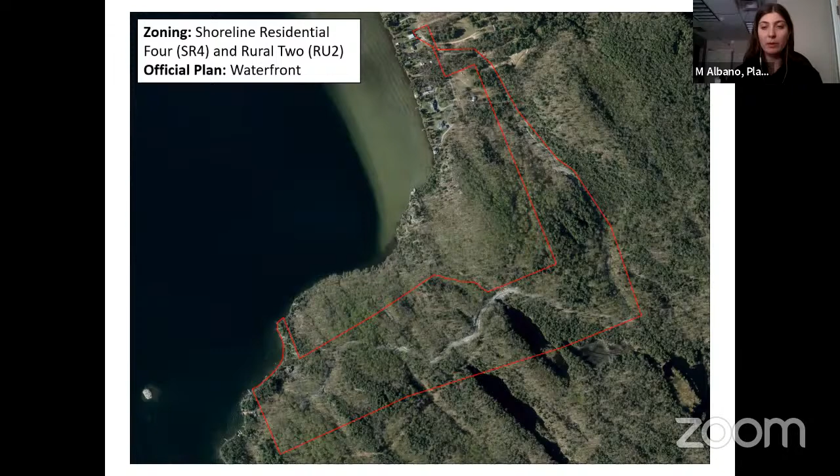Yes. Alrighty, perfect. Through you, Mr. Chair, the subject property is located at 658 The Bitter End. The lot is zoned Shoreline Residential 4 and Rural 2 under Huntsville's zoning bylaw and designated waterfront in Huntsville's official plan.

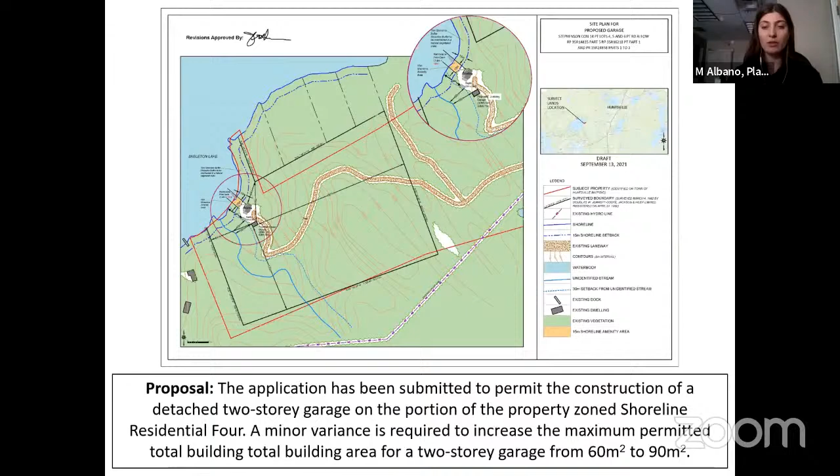The application has been submitted to permit the construction of a detached two-story garage on the portion of the property zoned Shoreline Residential 4. A minor variance is required to increase the maximum permitted total building area for a two-story garage from 60 meters squared to 90 meters squared.

Based on the configuration of the property, the increase in total building area for the two-story garage is expected to have minimal impact on the surrounding properties as the garage is compliant with the required setbacks and the lot is densely vegetated outside of the building envelope. This will also result in no visual impact from the private road or water. The design of the garage is in keeping with the character of the surrounding area and reflects the scale of the dwelling. Additionally, the garage is proposed in the most appropriate location in an already cleared area with surrounding vegetation.

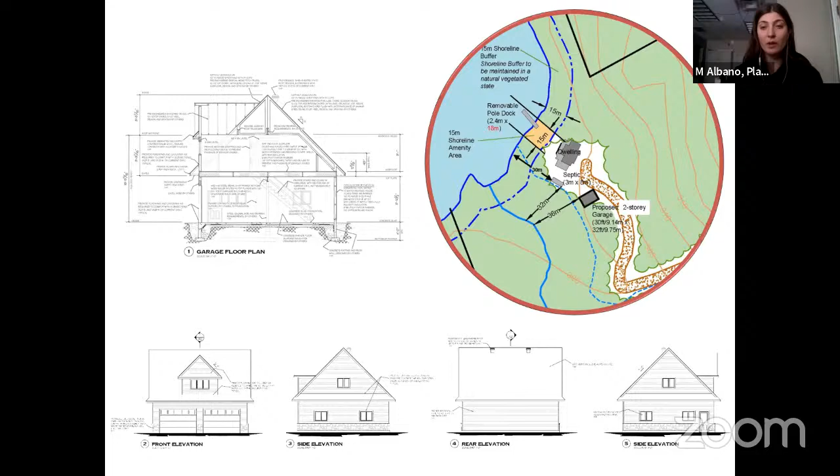Natural constraint mapping identifies steep slopes on a portion of the lot. As the garage is sited away from the steep slope areas, there are no concerns with respect to this natural constraint. The fish habitat abutting the shoreline is unevaluated. However, the proposed garage is set back over 30 meters from the shoreline of Skeleton Lake, so risks to any potential type 1 fish habitat are appropriately mitigated.

The application was circulated in accordance with the provisions of the Planning Act. Two letters of support were provided for the application and provided to committee prior to the meeting. The building department had no objection. The application would appear to conform to the intent of the official plan and be consistent with the provincial policy statement. Additionally, the application appears to satisfy the four tests for a minor variance as set out in the Planning Act, and therefore staff are recommending approval.

Thank you for your attention, and I would be happy to answer any questions that you may have. Thanks very much. I will go to the applicant or their representative to make any comments.

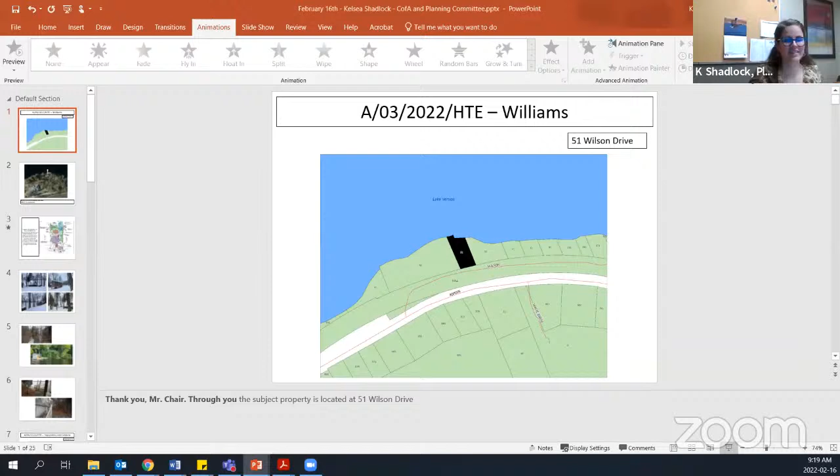Yes, thank you, Mr. Chair. I'll just prepare my screen. Great, is everyone able to see that? Yes, we are. Awesome. So thank you, Mr. Chair. Through you, the subject property is located at 51 Wilson Drive.

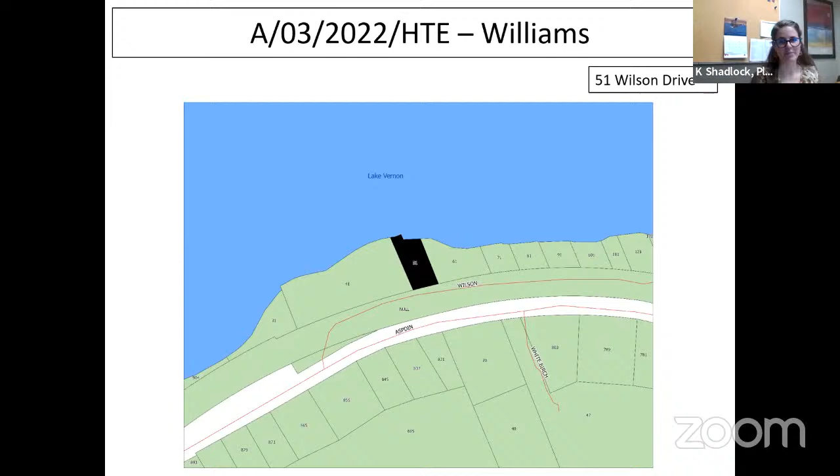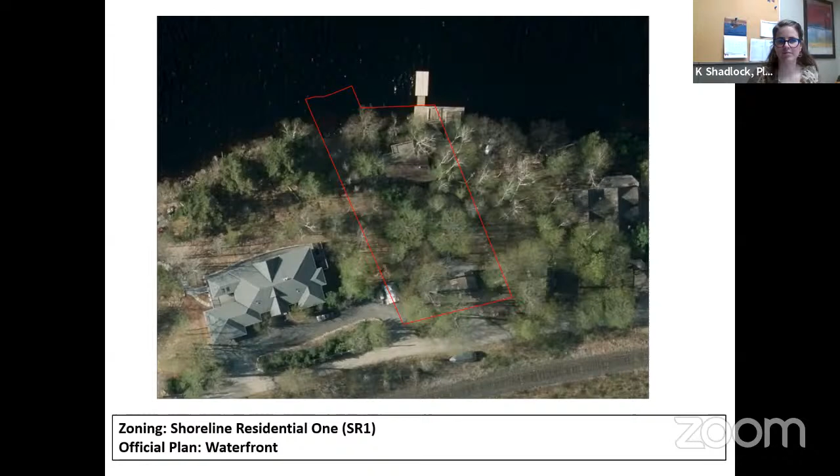The lot is designated waterfront and is zoned shoreline residential 1. The application has been submitted to permit the construction of a 199.7 square meter single detached dwelling. The minor variance is required to reduce the interior side yard setback from 6 meters to 3.05 meters for the dwelling, increase primary lot coverage from 10 to 12.85%, and increase accessory lot coverage from 5% to 6.90%.

The existing dwelling, garage, and private cabin are to be demolished. The garage will also be replaced with a utility shed with a smaller footprint, and the existing legal non-conforming boathouse and dock will be retained. So I've prepared an animation to show what's new, in purple, what's being demolished, in red, and then what's there and remaining.

The increased primary lot coverage is required because the subject property is an existing undersized lot. Additionally, it is a small increase from the existing primary lot coverage, but more appropriately sited outside of the shoreline buffer. The existing accessory lot coverage is being reduced by the removal of the private cabin and the replacement of the garage with a smaller utility shed. Therefore, the resulting accessory lot coverage will reflect the existing non-complying boathouse and dock, and smaller utility shed, improving accessory lot coverage.

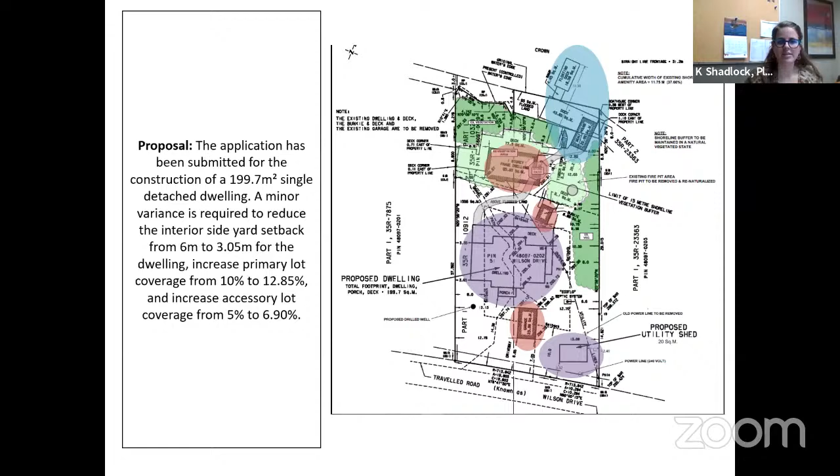Looking at the official plan guidelines, which promote development of buildings that are sited most appropriately on areas of the lot, limited in terms of mass and coverage and frontage on the property, and designed in keeping with the character of the surrounding area. In this instance, the proposal is going to demolish the existing dwelling, which is situated 6.9 meters from the shoreline, and position the new dwelling 20 meters back.

With the relocation, development in proximity to the shoreline and associated environmental and visual impacts will be reduced. Additionally, the project will bring the amenity area into closer compliance with the required cumulative width by vegetating the area of the former existing dwelling. The fire pit and the legal non-conforming boathouse and dock will remain. However, the planned revegetation creates a net improvement for the shoreline.

It's worth noting that the property abuts the CN rail corridor. The applicant consulted with CN, who noted that the proposed development was acceptable and recommended rail noise, vibration, and safety impact mitigation measures, which reflect the measures from the official plan and would be implemented through site plan control should the minor variance be approved.

Natural constraint mapping identifies unevaluated fish habitat, stratum 1 deer yard, and steep slope areas. A scoped environmental impact study was provided to address the natural constraint. The report concludes no negative impacts will occur provided the technical recommendations are implemented, which include installing a sediment fence, minimizing area of exposed soil, revegetation around the shoreline buffer and disturbed areas, and retaining existing vegetation. These recommendations will also be implemented through site plan control should the minor variance be approved.

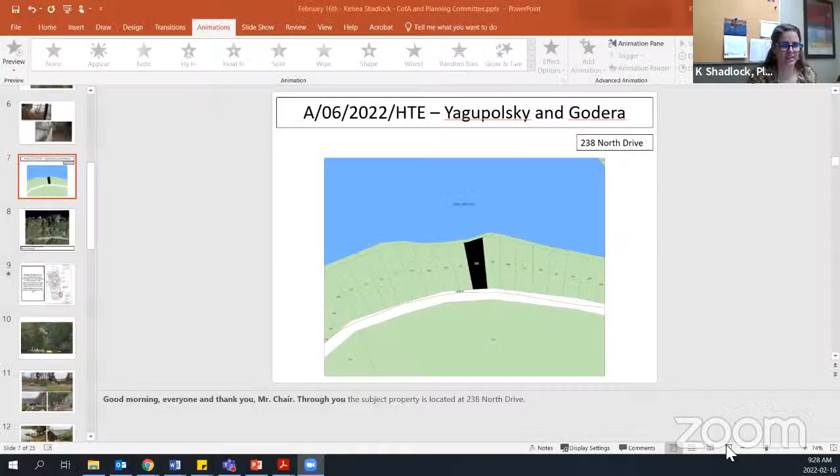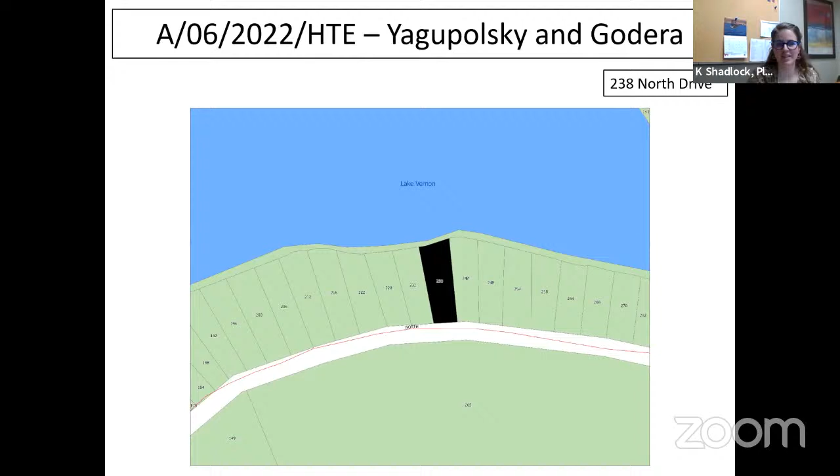I believe you can all see that. Thank you again, Mr. Chair. Through you, the subject property is located at 238 North Drive. The lot is designated waterfront and is zoned shoreline residential 1.

The application has been submitted to permit the construction of a detached 2-story garage. A minor variance is required to decrease the interior side yard setback from 6 meters to 2.3 meters for the detached 2-story garage, and to increase the accessory lot coverage from 5% to 5.3%.

Committee granted a minor variance for a 1-story garage in the same location on January 18th, 2022, through the approval of site minor variance application A43-2021. However, it was noted following the approval that the proposed garage was meant to be a 2-story structure. Although the garage will meet the height limitations in the zoning bylaw, due to the change to a 2-story building, a new minor variance was required.

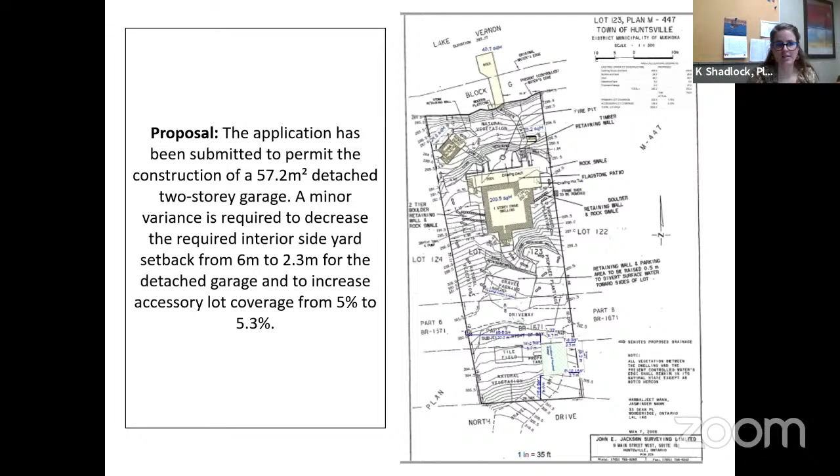It's just illustrating the setback. To recap, the garage is proposed in a portion of the property south of the laneway, where the abutting properties have no development or habitable structures, and the garage will be compliant with all other setbacks. Additional vegetation between the property line and the proposed garage is recommended to provide additional screening and shall be implemented through site plan control should the minor variance be approved. A condition has also been added to ensure no habitable space will be within the detached garage.

Looking at the official plan, the proposal is expected to result in minimal visual impacts from the water, as the garage is screened by existing vegetation and trees. And to reiterate, the height will also remain at 7 meters.

The application was circulated in accordance with the provisions of the Planning Act and to the Lake Vernon Association. No objections were received on this new circulation. The application would appear to conform with the intent of the official plan and the provincial policy statement. The application also appears to satisfy the 4 tests of a minor variance. Therefore, staff are recommending approval, and I'd be happy to answer any questions.

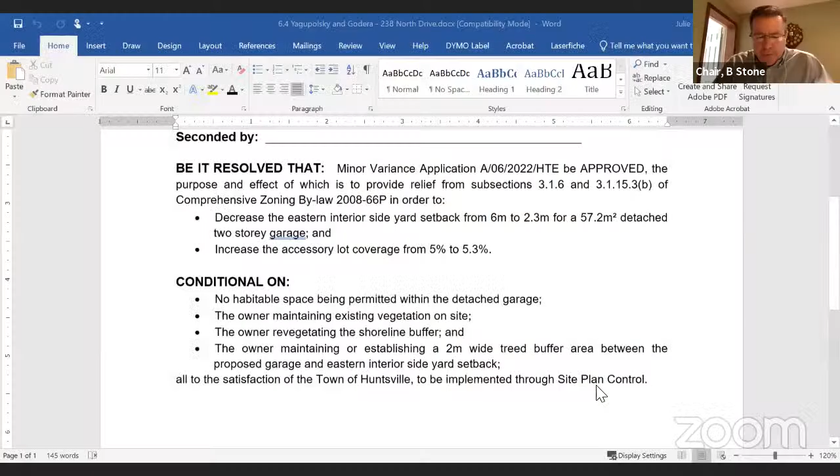Be it resolved that minor variance application A06-2022 HTE be approved. The purpose and effect of which is to provide relief from subsections 3.1.6 and 3.1.15.3b of the Comprehensive Zoning Bylaw 2008-66P in order to decrease the eastern interior side yard setback from 6 meters to 2.3 meters for a 57.2 square meter detached two-story garage, and increase the accessory lot coverage from 5% to 5.3%. Conditional on no habitable space being permitted within the detached garage, the owner maintaining existing vegetation on site, the owner revegetating the shoreline buffer, and the owner maintaining or establishing a 2-meter wide treed buffer area between the proposed garage and the eastern interior side yard setback to the satisfaction of the Town of Huntsville to be implemented through site plan control.

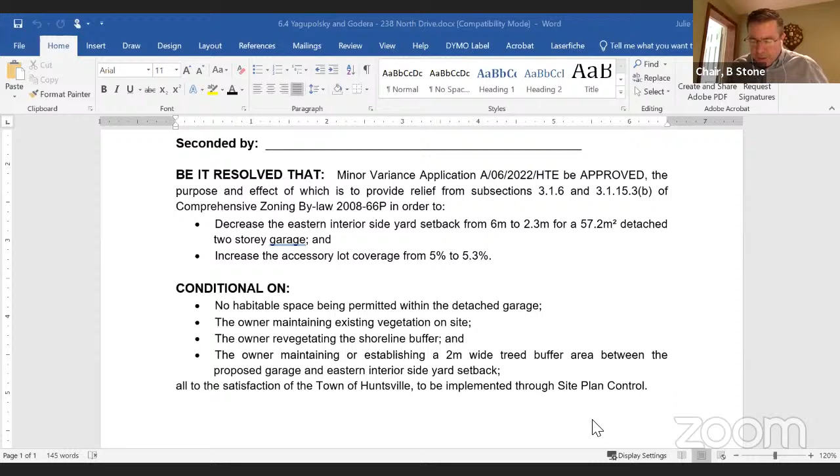Any last comments or questions? All in favor? And that's carried.

Wonderful. All right, thanks, Kelsey. Now that all comments have been received, I declare these public meetings respecting the above applications to be concluded.